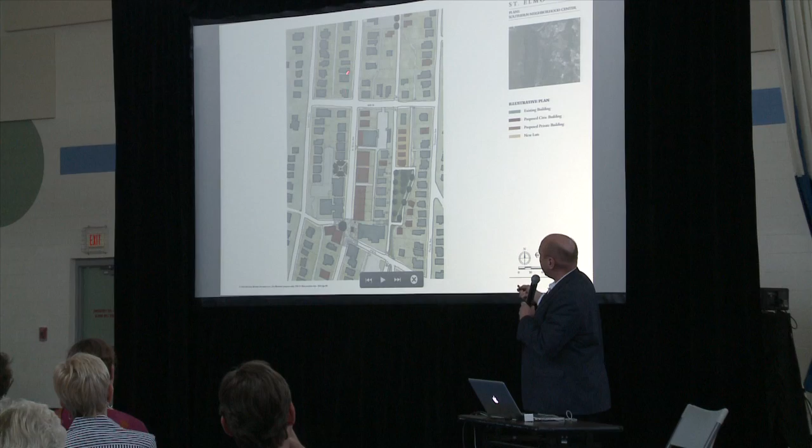So we're going to move out from the study area now and look at an idea for a particular intersection - 46th and 47th Streets intersecting St. Elmo. Some of the residents from the southern end of St. Elmo came in and said, you're right to focus so much attention on the center, but St. Elmo's very long and linear, and it's a hike for us to get into the center for a cup of coffee or a bite. At one time we learned there was a very interesting third place that served the southern end of St. Elmo called Okie Dokies.

Does anybody remember that? I think it's an absolutely fantastic name, and if you could find another Mrs. Okie and have her open up again, I think it would be absolutely terrific. Well, it doesn't have to be Mrs. Okie in particular, but somebody to run the third place.

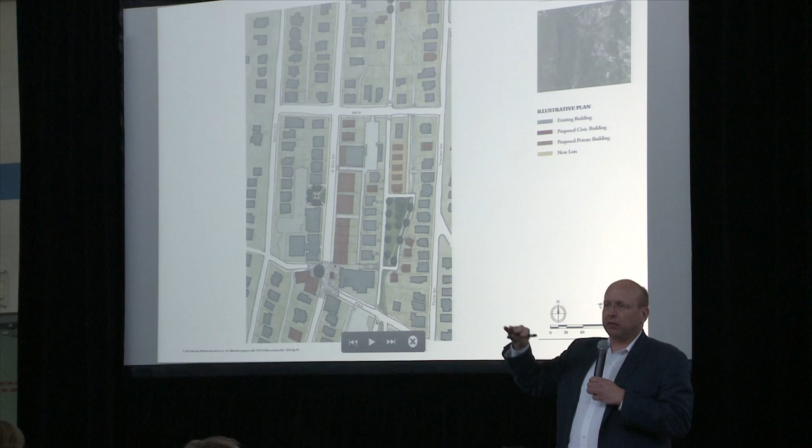So the idea is to restore some sort of third place at that intersection. Perhaps there's an opportunity to make a plaza for more gathering or a piece of civic art in front of the church here. And then because we had read the residential report and it tells about the housing demand for this area, we thought maybe there's an opportunity in the southern part of St. Elmo to introduce some new housing types.

It's not uncommon in a neighborhood full of big old homes to have a problem arise when the folks who've lived there for years, raising their families, find themselves no longer able to care for the home or no longer interested in all that maintenance, preferring instead a smaller place to live. They look around the neighborhood and find it's full of big homes that require lots of maintenance and care, and what they'd really like is a smaller place, but in the neighborhood, because it's their community.

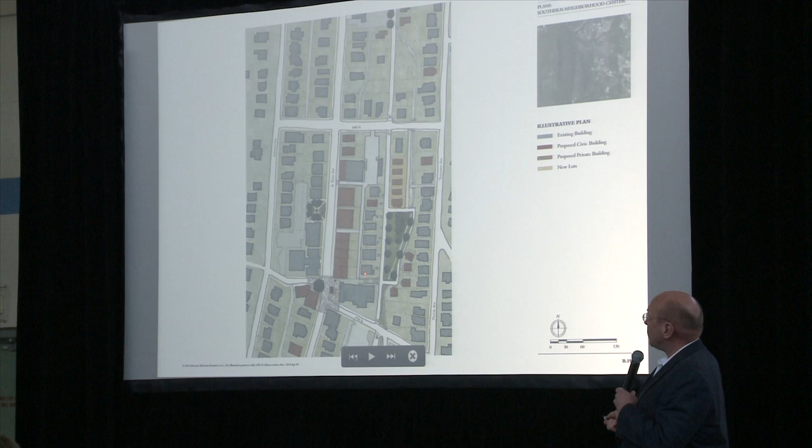So one thought is that there could be an opportunity here to introduce some new housing types, perhaps townhouses. The small apartment building with 4 units or 6 units is another great model, could be elevator served even. So that's what we're suggesting here, to put just a little bit more density in the area of this town center. And if you're wondering what happens to the existing houses that are there, because they're quite nice, we suggested they could be moved to the back of that lot and face Virginia Avenue.

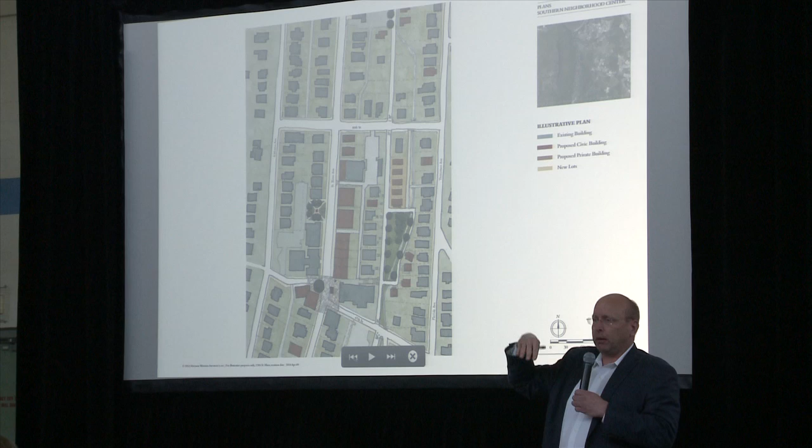Now, this is probably a good time to acknowledge that I don't own this land. We understand it's owned by an individual, or several, or what have you. These are just ideas - this isn't going to happen without their participation. But it could be that somebody a few doors away likes the idea, or a block over, and says, I'd make provision for some smaller units like that on my lot. So it's just an idea we're putting out there because one of you came in and said, how about something of a little center down at the south end?

Okay, so if those units were moved back to Virginia Avenue, it's looking a little underutilized, right? There's just - it's quite nice as it is, but underutilized.

If this is a place that anticipates growth, one could easily imagine that some of that might occur here.

Now, a few other things you notice. There's a charming ditch running through here, built by hand. It's an interesting piece of infrastructure that simply lies in the backyards of a number of folks.

That this trail connects through the length of St. Elmo makes it ideal as a pedestrian and bike trail, because there are fewer curb cuts and that kind of thing.

One of the other things we did when we were here in January is to read the prior reports that other planners had done to prepare ourselves. Your regional planning authority did a plan in 2001 in which they proposed auxiliary units, that people who own homes and property here be allowed to have a rental unit on their lot, which is really the ideal form of rental housing when you have the tenant living right next to the landlord, because everything is monitored, where the trash is kept and the noise level and all of those things. So it's a great tenant-landlord relationship.

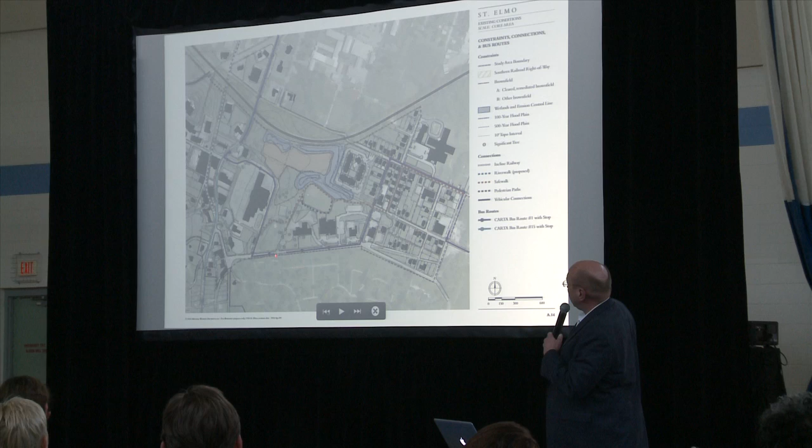There's the interesting configuration of the property line that runs between the park and the school. So there's this layering, and the topography is another challenge out there. There's some beautiful mature trees, another challenge out there.

So as we started looking at plans, there was also a study done on the residential demand for this area. We took that study and mapped it at the same scale as this drawing. If you take the findings of the residential consultant, what they're saying is that in the next 3 to 6 years, there's demand that could be absorbed in St. Elmo.

For 275 new residential units. That's not houses, it's not apartments, it's actually a mix that includes everything, so 275 is the total. They suggest there's demand for 65 detached houses, 50 townhouses, 40 multifamily for sale, and 120 multifamily for rent.

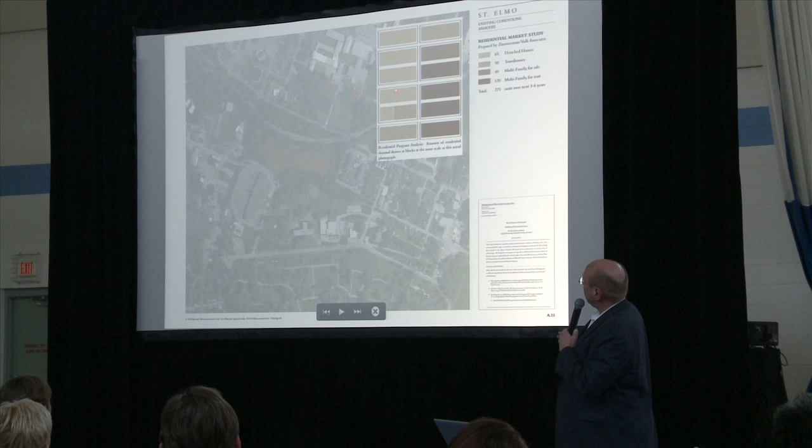Now, that's not to say you're going to get that. All they're doing is saying that's the kind of demand we found. So if you take that demand and put it on the ground, it requires this much real estate. The colors may be a little hard to distinguish in this light, but in the report you'll see clearly that this much of it is the single family detached and so forth. Just to give you visually an idea how much area that takes up.

Then we started doing plans. I showed you the first two iterations. We got a call after the design charrette because people started reacting, saying yes, but what about this idea and what about this idea? So we prepared another plan in which the fields were placed on the poor soil.

Okay, that covers everything I said. Now, what happened after we did that is some folks said, but we like the fields next to the rec center. And there's some reason for that - if you're running the summer camp and you've got a group of kids going outdoors to play, there's not necessarily a hike involved if the fields are right next to the rec center.

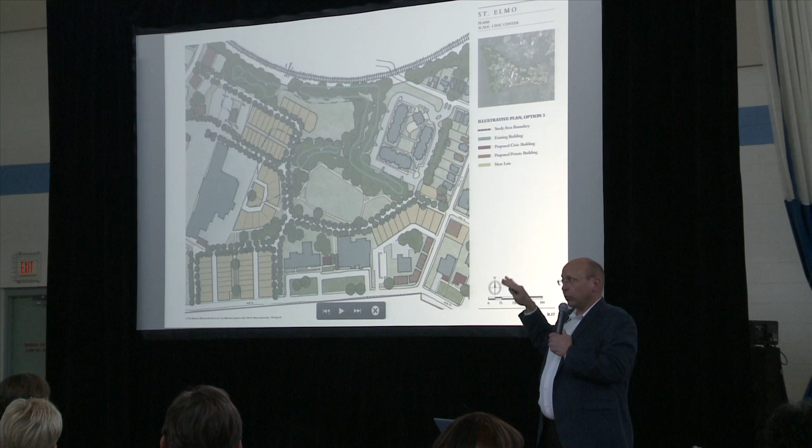This scheme yields 37 40-foot lots. So it's interesting that we're able to accommodate the fields and even provide for some additional housing and get the connection. The more input we get, the better the plan gets, the more interesting the plan gets.

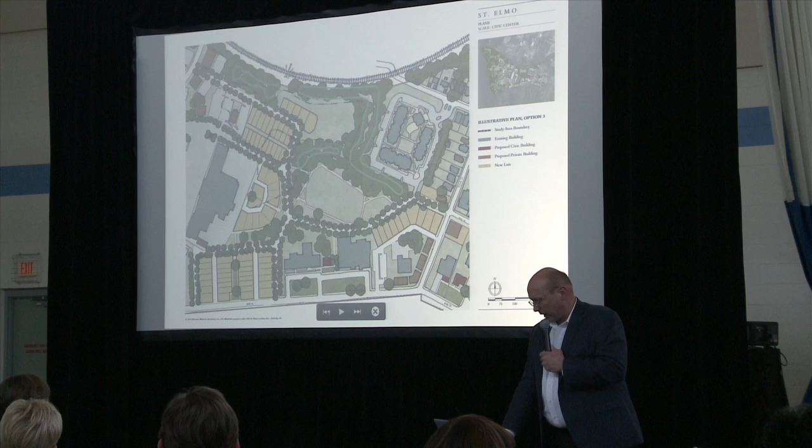So that's the reason for you all to stay very involved in offering your input. But let me mention one thing here. This list over here, this annotated list, is basically what I'm telling you now. All these things are noted on the side.

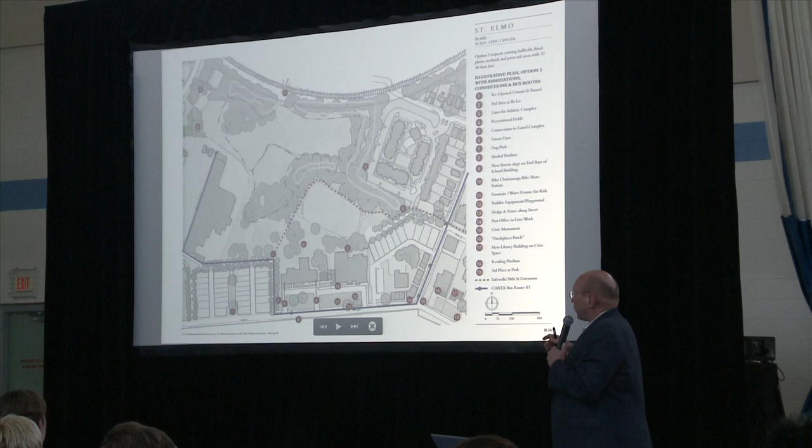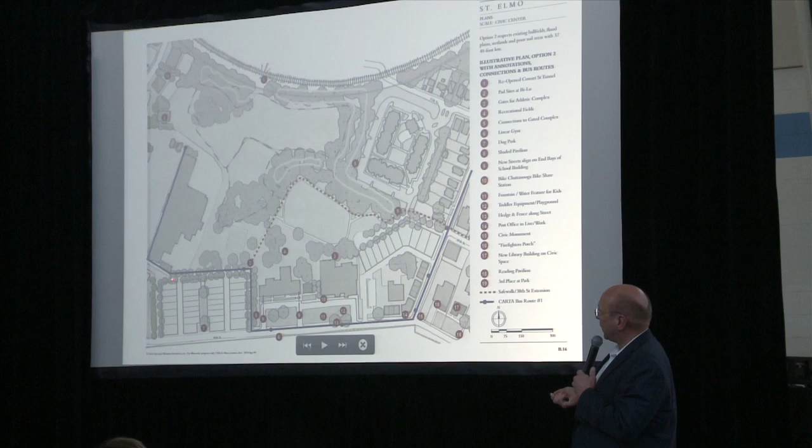So I'm feeling very proud of ourselves. I was reviewing a copy, the hard copy of this report, on the plane on the way down last night, and reading through the list of ideas. I noticed that these are home lots with an alley behind, and then a street here. The street wraps around like this, so you get fronts of houses facing down the nice big green here.

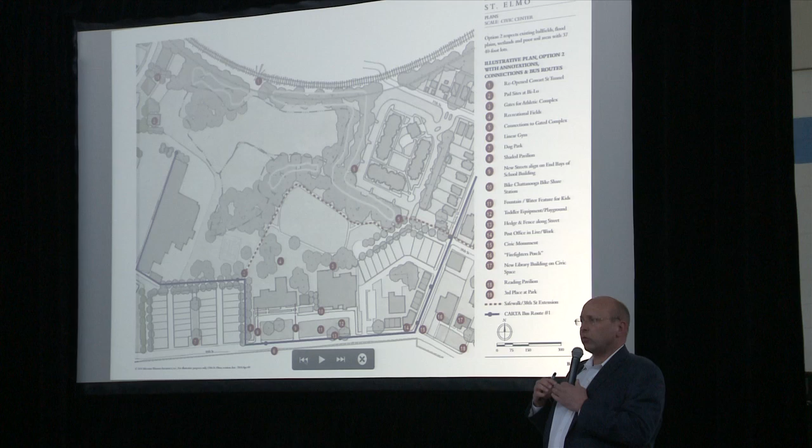This one we thought we would have houses just facing a pedestrian path. Not every street has to have cars—a small group of houses facing a pedestrian path. Note number 7, over here's a dog park. Okay, we're not going to propose a dog park in front of those houses. It's a mistake. So we have some I's to dot and T's to cross.

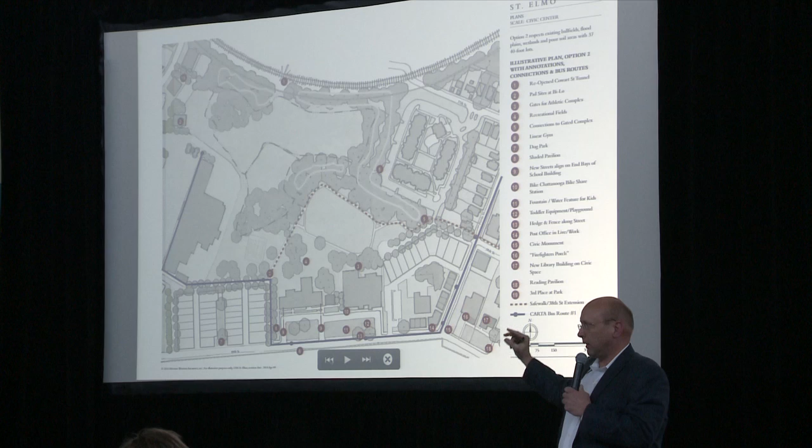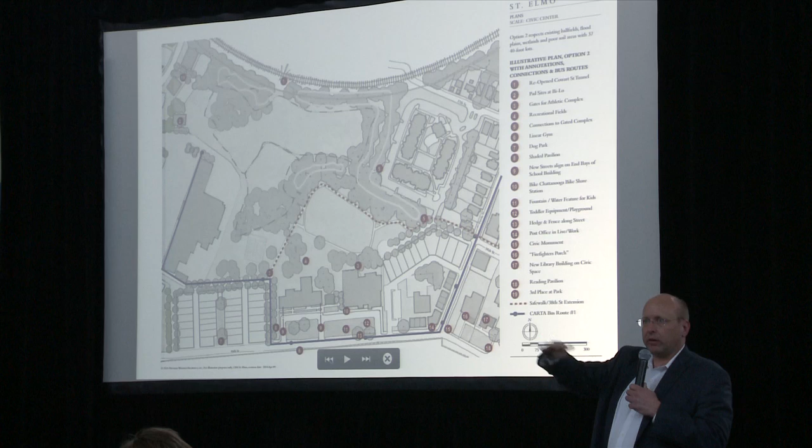So we're going to make a list in case that's not the only oversight in the document. We are going to address all of those. The folks at CNE are going to comb through the document, and we're thinking it'll take just a couple days to fix things like this. By the end of next week, you should have access to this document online. The folks at CNE are going to make it widely available. We just need a couple more days to fix some things like that.

Now, very often, not so much here in St. Elmo, because frankly Chattanooga is a pretty advanced place when it comes to good urbanism—like the people you have here and the thinking that goes on here, it's very interesting to see, which explains why you have so many interesting things going on, I think, frankly.

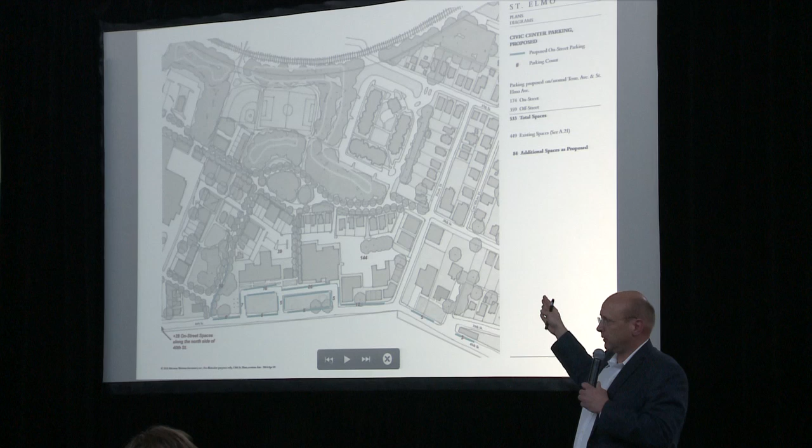Other places, the constant question that would come up is, what about parking? So without being asked, just because we thought it would be expected, we did a parking study in the Civic Center area, and also in the downtown, to see how many parking spaces are gained or lost if you implement these ideas.

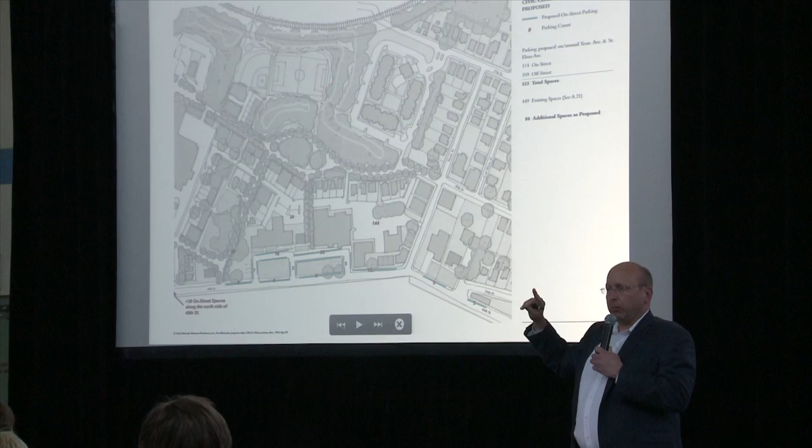So if we get rid of the parking lots, or the biggest parking lots behind these buildings, and move them to the front and add parking on street and so forth, with this plan we pick up 84 additional parking spaces. And the homes all have parking spaces on their lots, not available for public use.

When we're adding new lots and even new streets, sometimes in order to maintain the pattern of the existing urban fabric, a new code is necessary because municipalities have inadvertently adopted more suburban, use-based design standards. What we're proposing is that you consider a form-based code. We proposed that to some folks during the Charrette, and they loved the idea. In fact, they were ready with it before we even proposed it, saying we really need a form-based code. So we've drafted that as well, and it includes proposals for new streets.

Your streets are absolutely charming here, sometimes a little narrow. Couldn't the sidewalk be a little wider in places, or have one more tree, a little more room? So these are the kinds of standards that provide that extra space.

We also looked at very particular places like the intersection of 40th and Tennessee. Other people had done that before us, the Transportation Department and the folks at Think Bike. We picked one of those schemes, but I think there's a way to elaborate that corner that would create a great opportunity to terminate the vista down 40th and the vista down Tennessee with a piece of public art. You guys are about to install a great piece downtown already, so this is just lining you up, setting you up for your next project, perhaps. Great location for that.